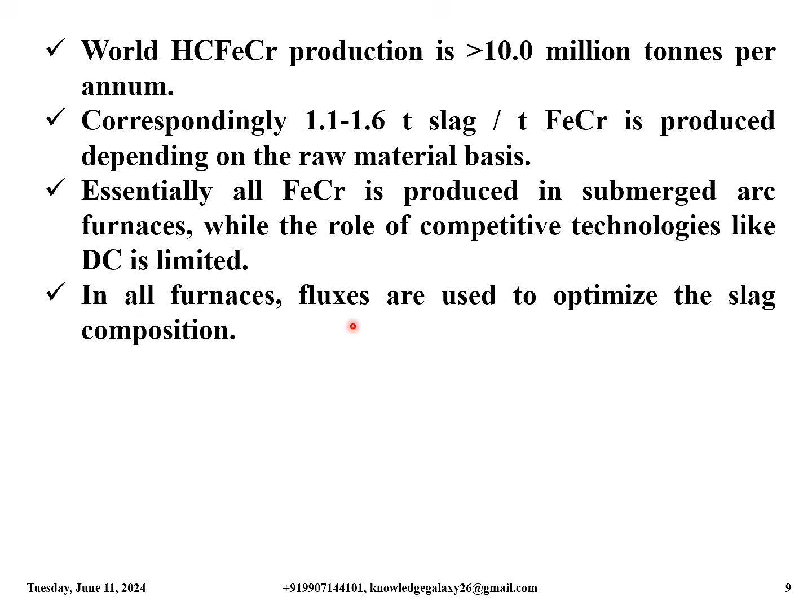Essentially, all ferrochrome is produced in submerged arc furnaces, while the role of competitive technologies like direct DC is limited. In all furnaces, fluxes are used to optimize the slag composition. Vital characteristics of slag are melting point, electrical conductivity, and viscosity. The main components of ferrochrome slag are SiO2, Al2O3, and MgO.

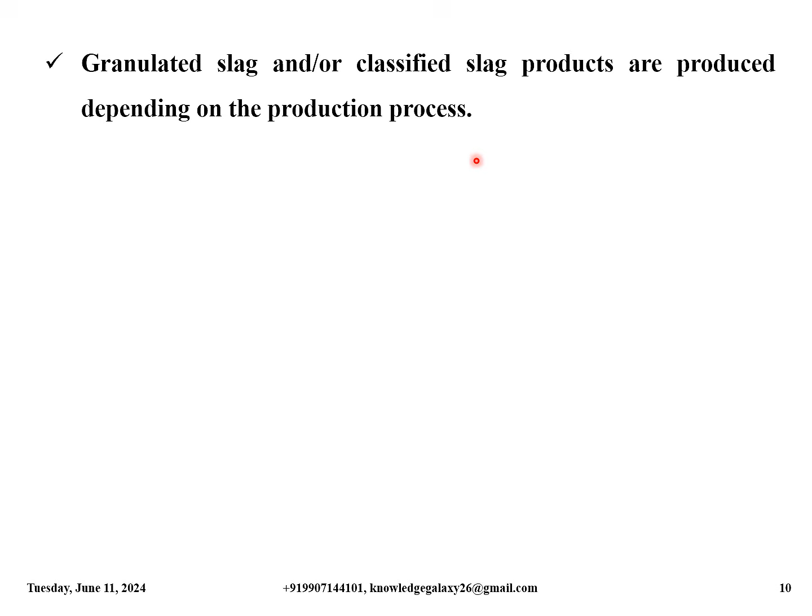Additionally, it consists of chromium and iron oxides and CaO. Granulated slag and/or classified slag products are produced depending on the production process. The slag products are mainly marketed for road and civil construction purposes, but also for producing refractories.

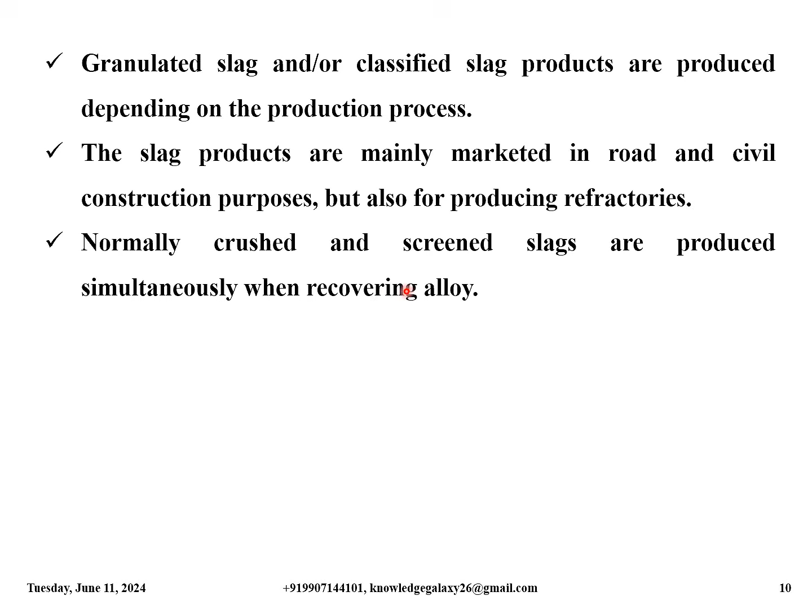Normally, crushed and screened slags are produced simultaneously when recovering alloy. The leachate of slag products is low and performance results are excellent. Slag products successfully replace natural sand and macadam. Generation of waste is essentially reduced. Producing and using slag products is good technology, and it is an essential environmental aspect.

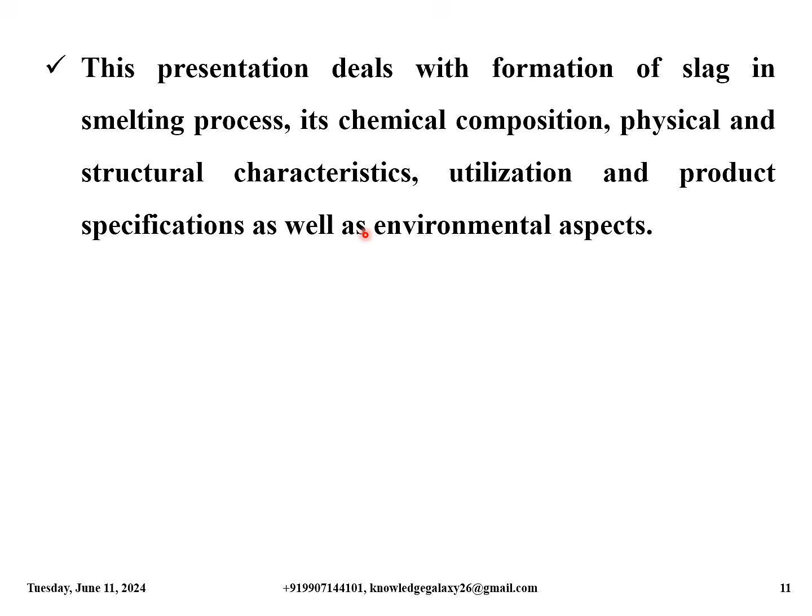This presentation deals with formation of slag in the smelting process, its chemical composition, physical and structural characteristics, utilization and product specifications, as well as environmental aspects.

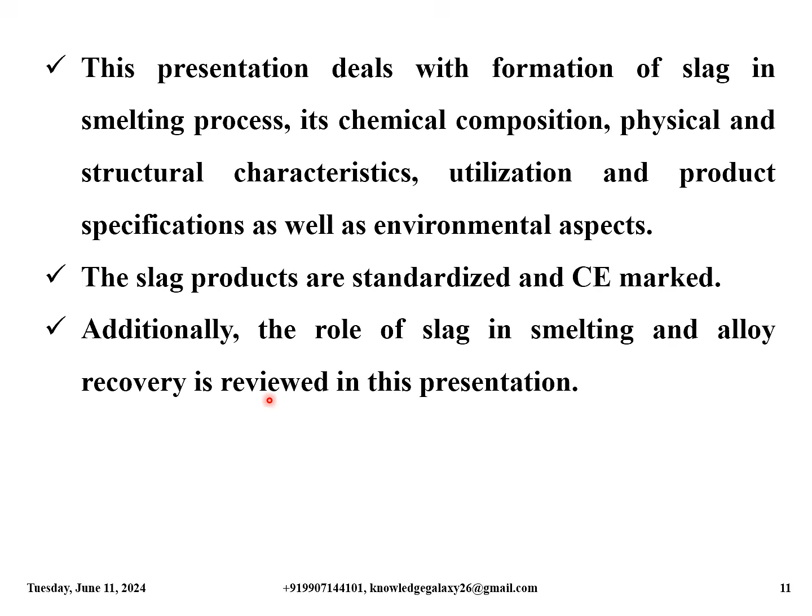The slag products are standardized and CE marked. Additionally, the role of slag in smelting and alloy recovery is reviewed in this presentation.

The raw material in the production of ferrochrome is chromite ore, which is a chrome and iron oxide containing mineral. Chromite is used as lumpy ores or fine concentrates, which must generally be agglomerated to make them a usable charge for the furnace.

Fines in the smelting furnace cause unbalanced operation and thus decrease productivity.

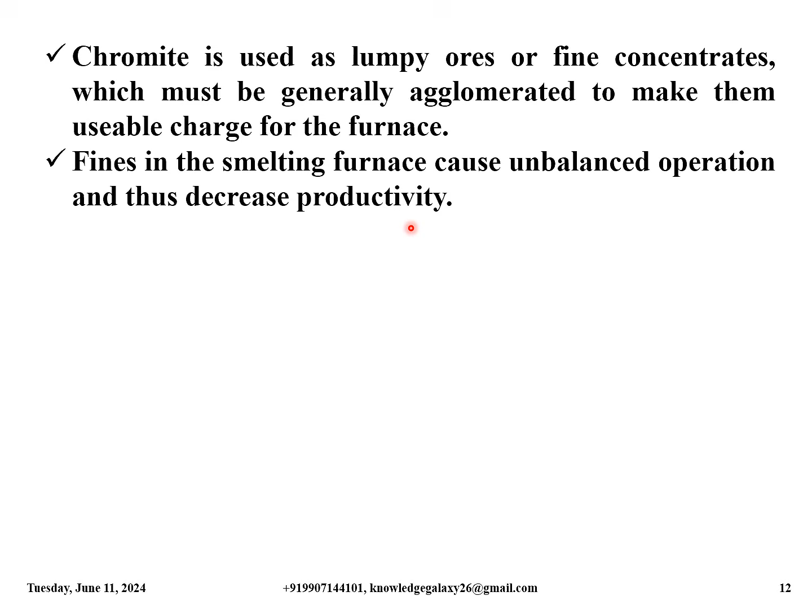Different types of carbon sources are used to reduce metal oxides in the furnace. The most important of them is metallurgical coke.

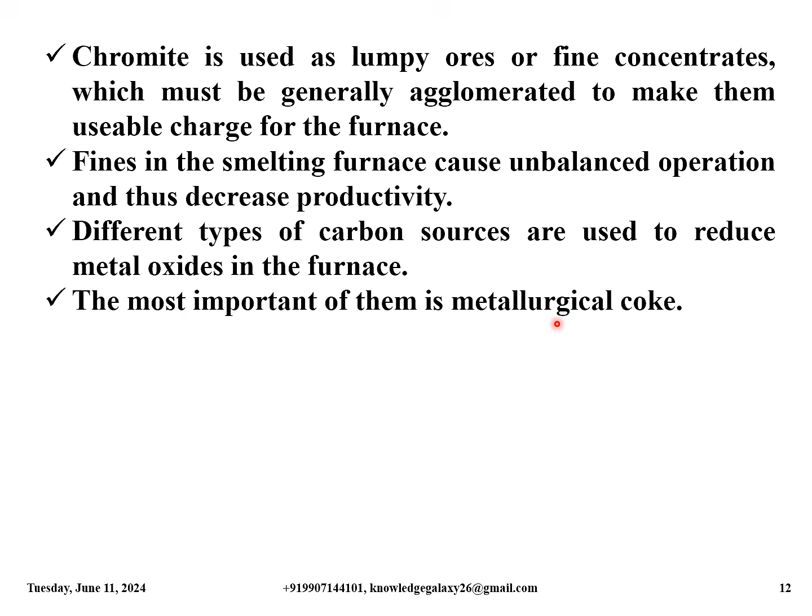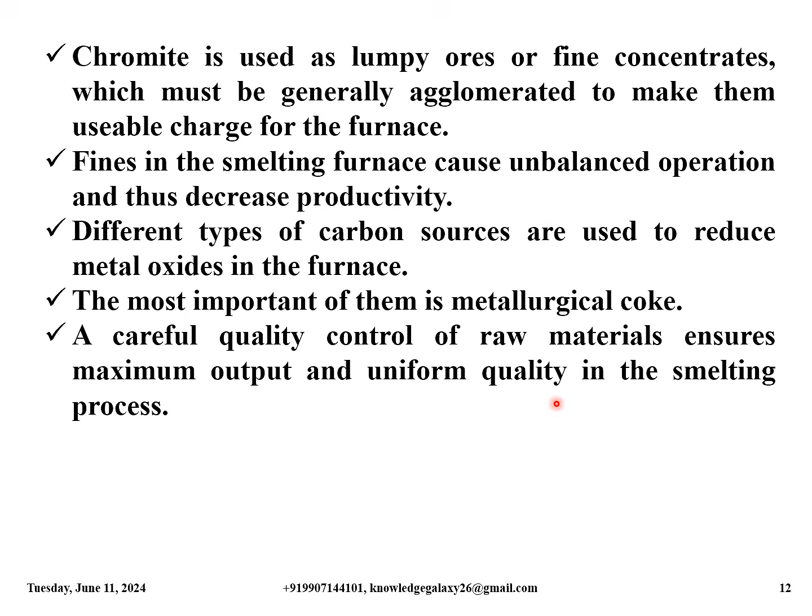A careful quality control of raw materials ensures maximum output and uniform quality in the smelting process. Quartzite, bauxite, dolomite, corundum, lime, and olivine are used as fluxing materials to get the right composition of slag.

The smelted products obtained from the smelting furnaces are ferrochrome alloy and slag. The slag production is in the ratio of 1.1 to 1.6 tons per ton of ferrochrome production, depending on the feed materials.

Using modern process control and good quality charge materials, the optimal slag composition can be attained. Important factors are temperature and composition of the slag, viscosity and electrical conductivity.

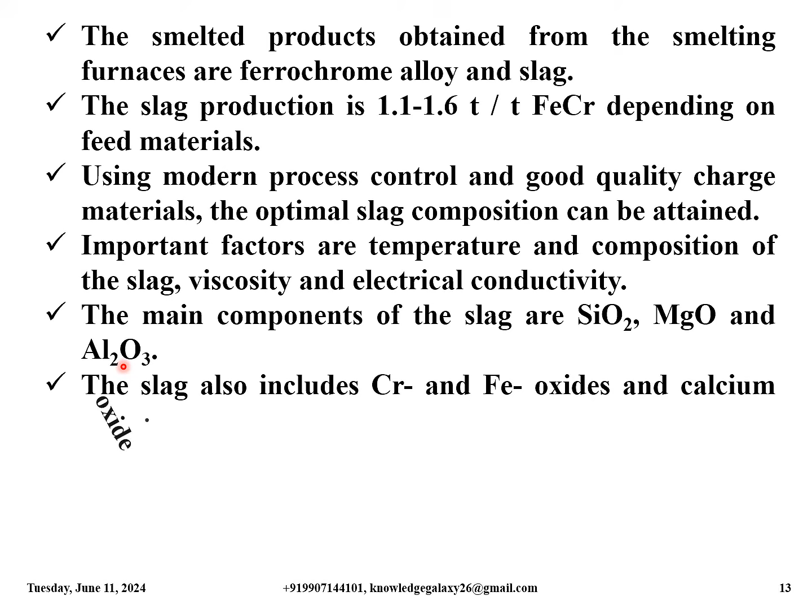The main components of the slag are SiO2, MgO and Al2O3. The slag also includes chromium and iron oxides and calcium oxide. Common phases in the slag are glass, spinels and forsterite. The slag chemistry is vital for efficient ferrochrome production.

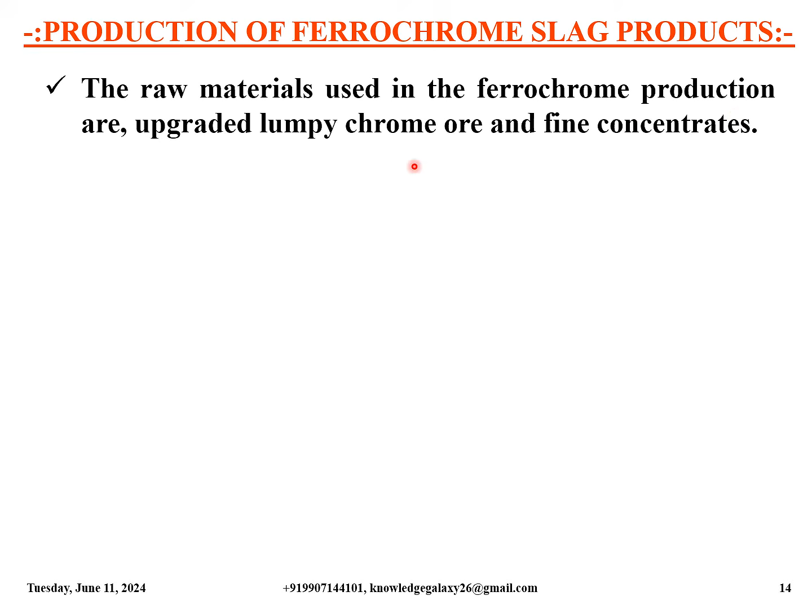Moving ahead, let us discuss the production of ferrochrome slag and products. The raw materials used in ferrochrome production are upgraded lumpy chrome ore and fine concentrates.

Fine concentrates are first ground and made into pellets in the sintering plant. The pellets are then sintered in the sintering furnace at a temperature of 1400 degrees Celsius. The charge of the smelting furnaces consists of pellets, upgraded lumpy ore, reducer that is metallurgical coke, and flux that is quartzite.

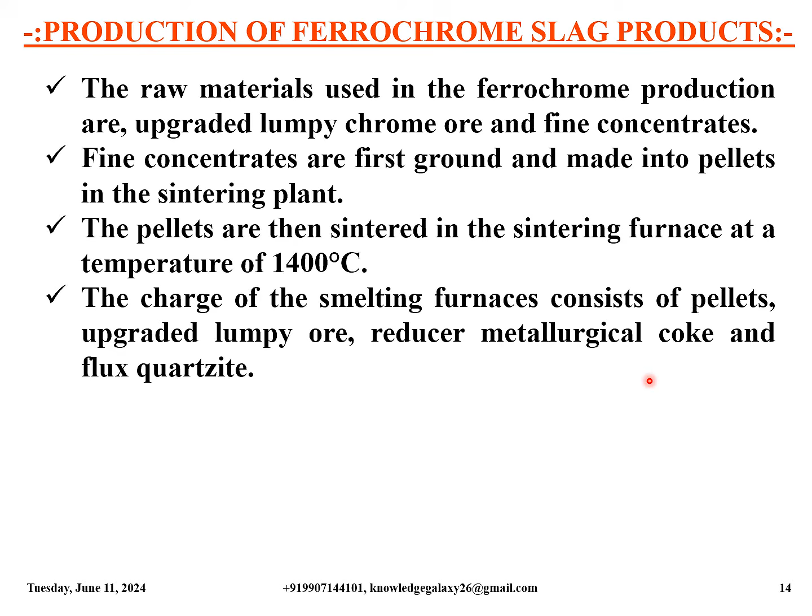Before smelting, the materials are preheated up to 500 to 800 degrees Celsius by burning carbon monoxide gas in a shaft preheater. This carbon monoxide gas is already produced during the reduction reactions by the metallurgical coke, and is very rich in energy. Its usage is essential, as it reduces CO gas emissions in the environment and also reduces energy consumption, thereby making the process more economical.

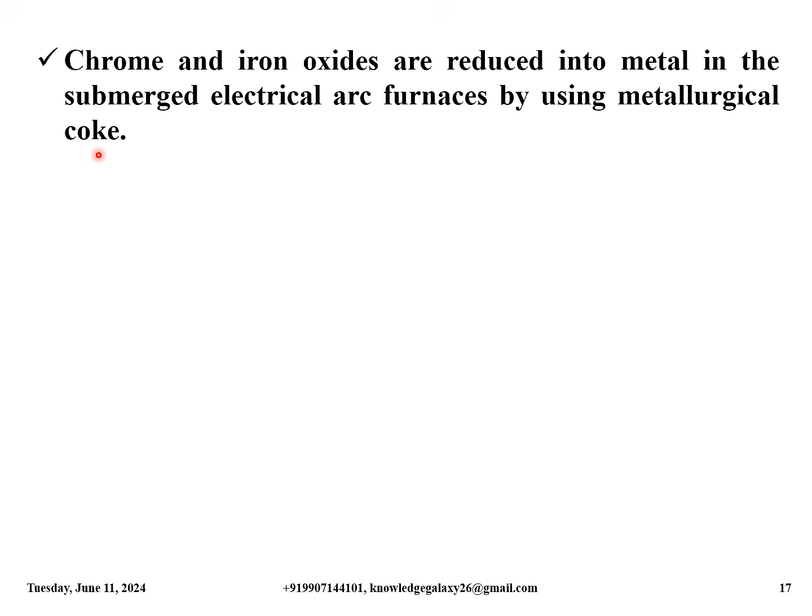So let's move on, coming back to the presentation and continuing. Chrome and iron oxides are reduced into metal in the submerged electric arc furnaces by using metallurgical coke. Simultaneously, part of silica is also reduced.

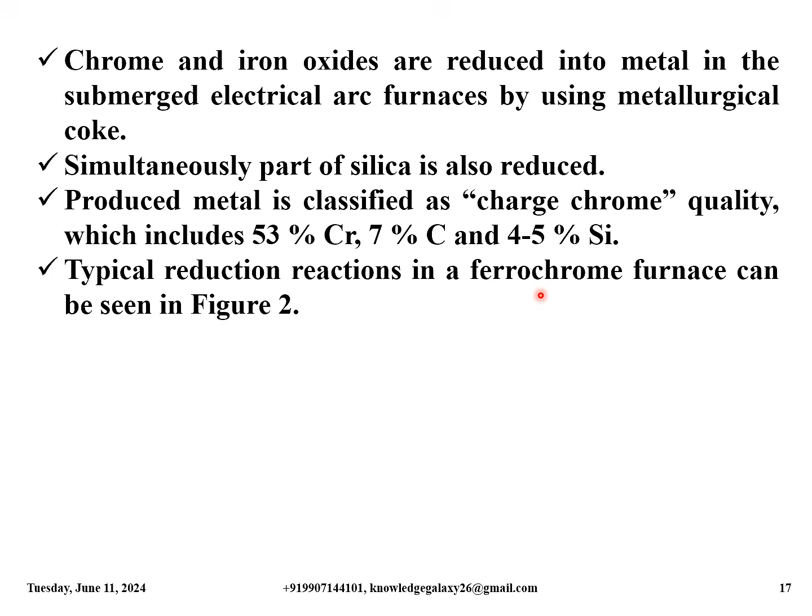The produced metal is classified as charge chrome, and the quality of which includes 53% chromium, 7% carbon and 4 to 5% silicon. Typical product reduction reactions in ferrochrome furnaces can be seen in figure 2, given in the next slide.

The other products in the smelting process are CO gas and ferrochrome slag. CO gas results from the reduction reactions. It is generated at the rate of 700 normal cubic meter per ton of ferrochrome produced, and it includes 85 to 90% CO, that is carbon monoxide, and 5% hydrogen.

At high temperatures, the charged materials start to smelt due to various reactions. Materials not dissolving into metallic ferrochrome phases primarily form silicate phases, which are generated to form ferrochrome slag.

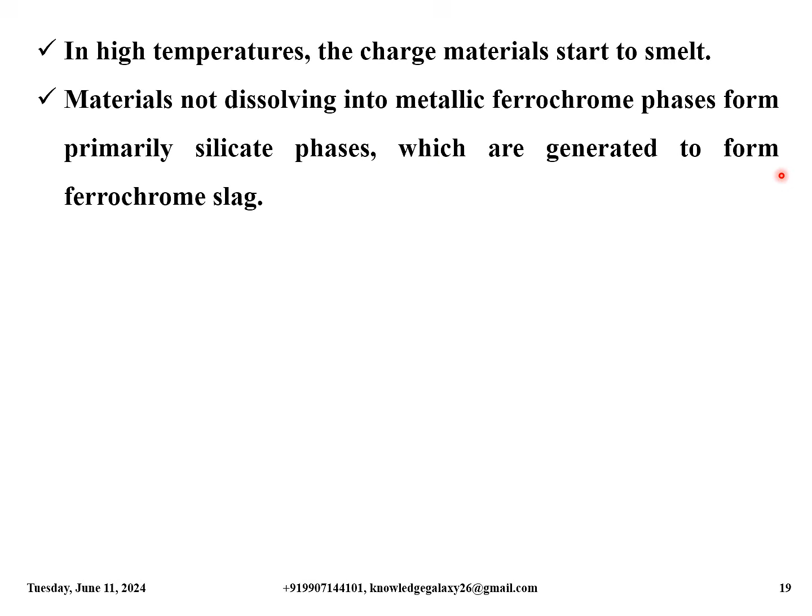The products obtained from the smelting furnaces are ferrochrome alloy and slag, and they are tapped into ladles at 2.5 hour intervals, depending upon the furnace transformer capacity and liquid metal and slag handling capacity. It is mainly granulated and the rest is air cooled. This is about the ferrochrome slag.

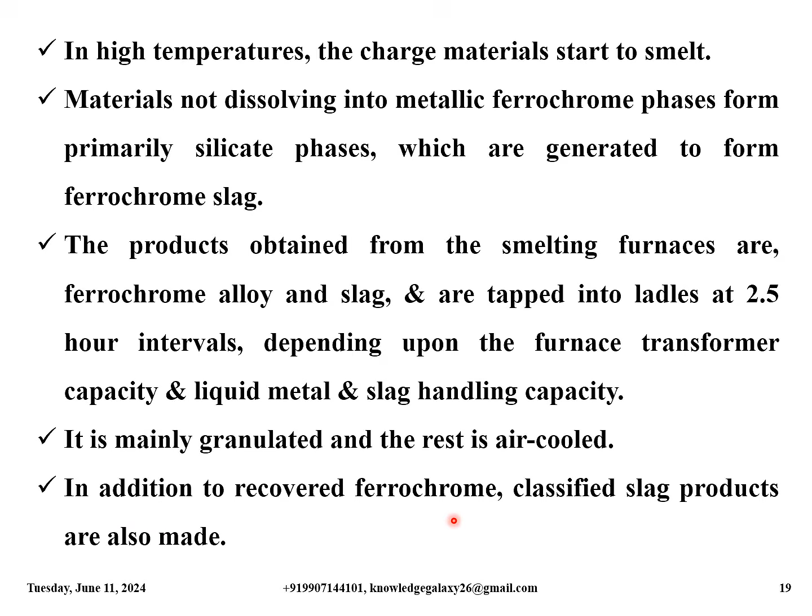In addition to recovered ferrochrome, classified slag products are also made. Now let us discuss in detail about the ferrochrome slag.

The temperature of the slag during tapping is 1700 degrees Celsius, and that of the ferrochrome alloy is 1600 degrees Celsius. The melting point of the slag has to be higher than the metal melting point because metal is heated up by using slag liquid phase, for efficient slag metal separation.

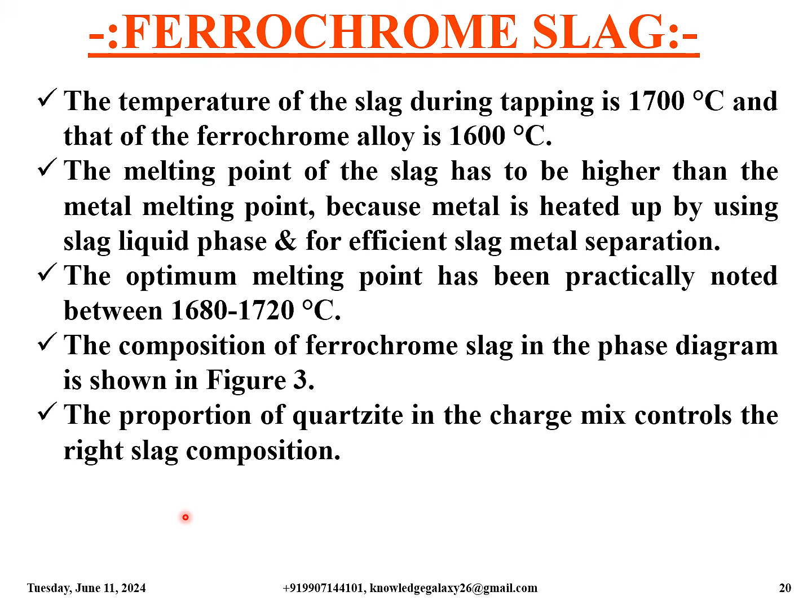The optimum melting point has been practically noted between 1680 to 1720 degrees Celsius. The composition of ferrochrome slag in the phase diagram is shown in figure 3 in the coming slides. The proportion of quartzite in the charge mix controls the right slag composition. The slag composition is tested every day by sampling and analysis.

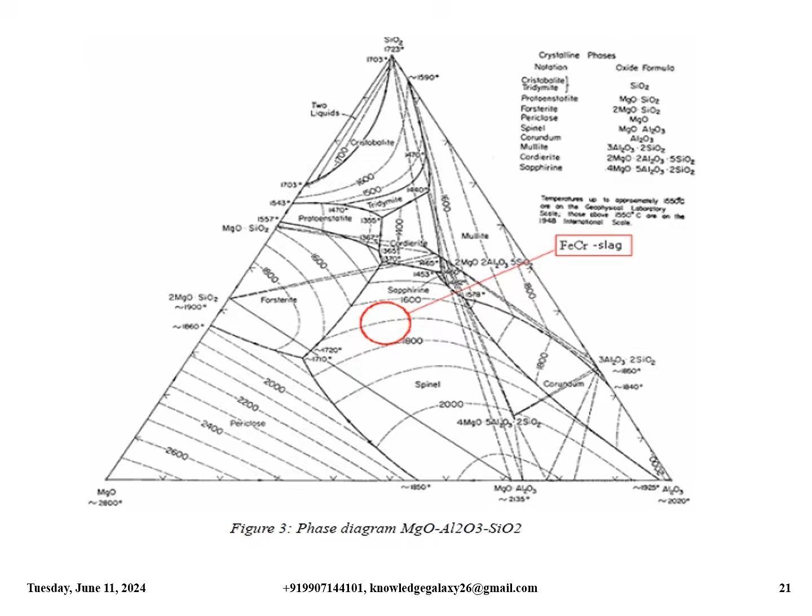This is the typical phase diagram of MgO, Al2O3, SiO2 in the ferrochrome slag phase, and you can observe it in detail. This is the particular region where the ferrochrome slag is obtained. Okay, going good, let's move on.

The typical ferrochrome slag composition is 30% SiO2, 26% Al2O3, 23% MgO and 2% CaO. The chrome content in the slag is about 8% and the iron content is 4% respectively. Ferrochrome slag is acidic in nature.

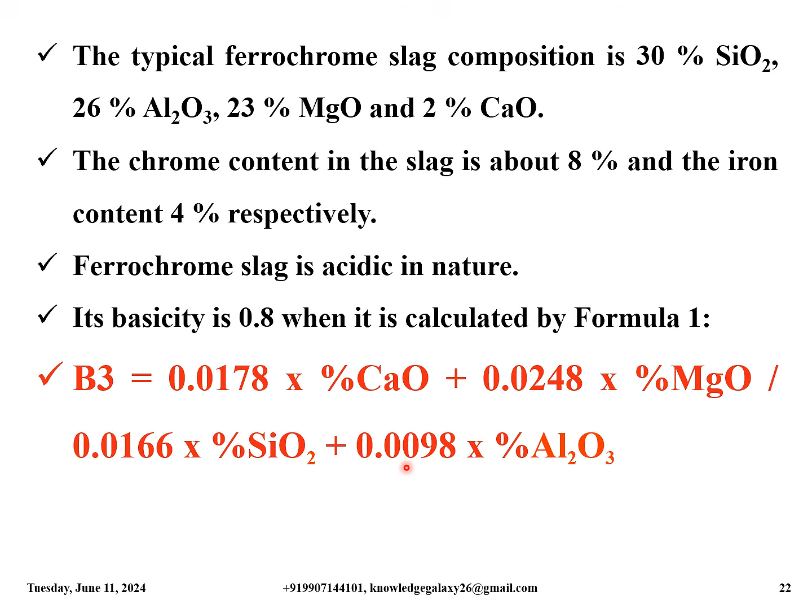Its basicity is 0.8 when calculated by the formula: B3 equals 0.0178 times percentage CaO plus 0.0248 times percentage MgO, whole divided by 0.0166 times percentage SiO2 plus 0.0098 times percentage Al2O3.

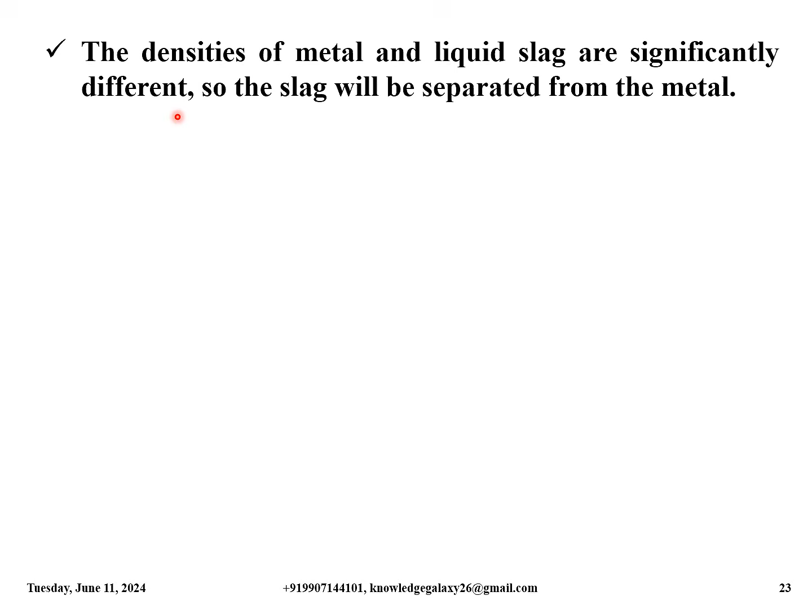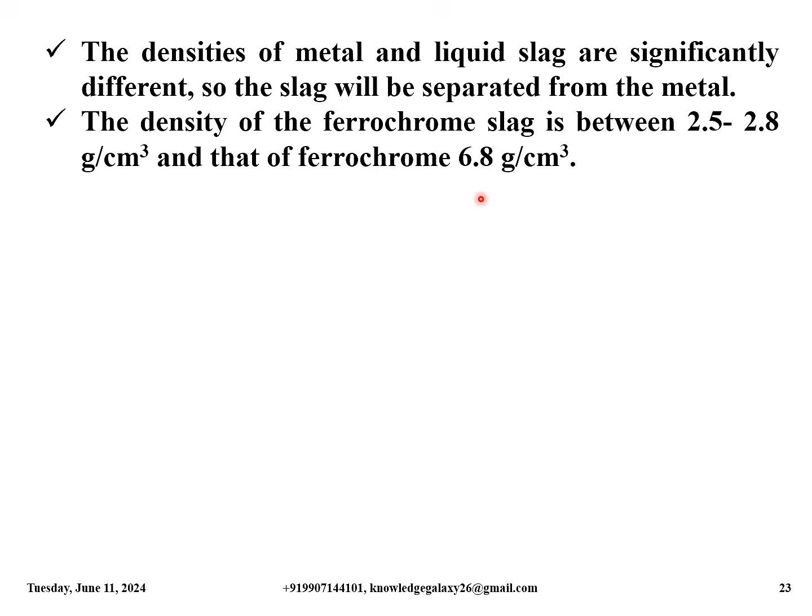The densities of metal and liquid slag are significantly different, so the slag will be separated from the metal. The density of the ferrochrome slag is between 2.5 to 2.8 grams per cubic centimeter and that of ferrochrome alloy is 6.8 grams per cubic centimeter.

The viscosity of slag is a function of composition and temperature, and it also has an essential meaning in the separation of slag and metal. The viscosity of the ferrochrome slag will increase when the content of SiO2 and Al2O3 rise, in which case aluminium silicon chains also grow.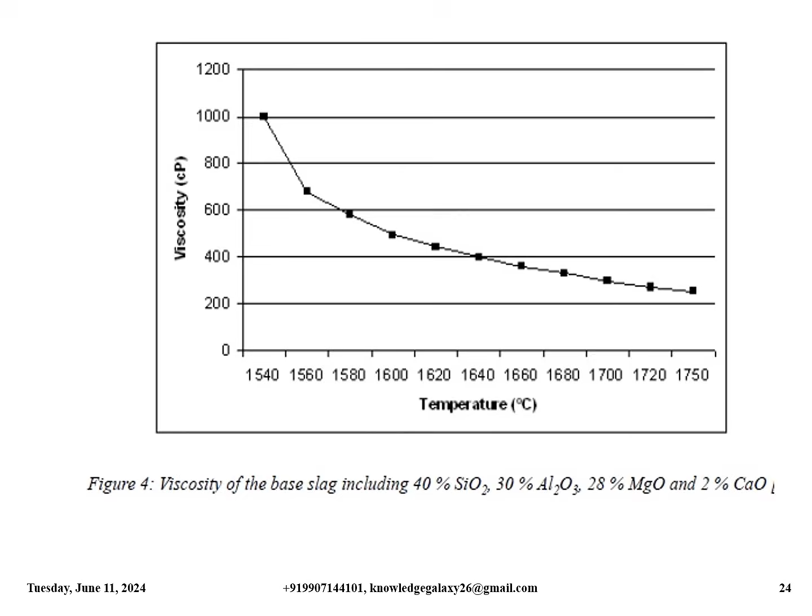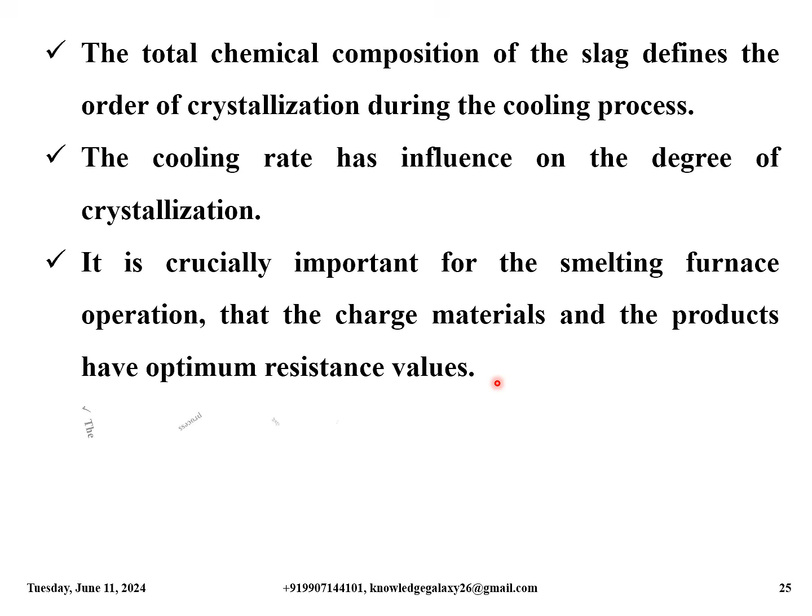The total chemical composition of the slag defines the order of crystallization during the cooling process. The cooling rate has influence on the degree of crystallization. It is crucially important for the smelting furnace operation that the charge materials and the products have optimum resistance values. The process slag has a conductivity of 50 to 70 S per M calculated by the Johnston formula.

Now let us again discuss something in detail about the ferrochrome slag products. The ferrochrome slag products are granulated slag as well as classified slag products made by crushing and screening. The main part of slag is granulated.

The crushed and screened slag products are produced from air-cooled lumpy slag which is collected from various process phases, for example from ladles and launders. The slag is directly granulated during tapping where ferrochrome is tapped into ladles.

The overflow from the ladles flows along the slag launder to the granulation pond, where high pressure water breaks slag into small fractions and efficiently cools it down.

Granulated slag is a very homogeneous product. The grain size is less than 6 mm. A granule is tight and partly crystalline.

Typically, the granulated slag includes 3 different phases: amorphous glass phase, crystalline and zonal iron, magnesium, chromium, aluminium spinels, and metal drops.

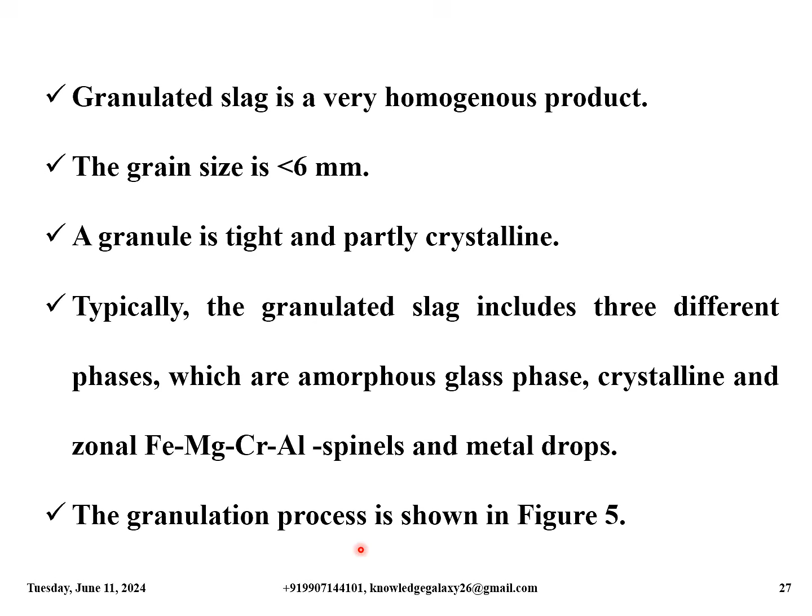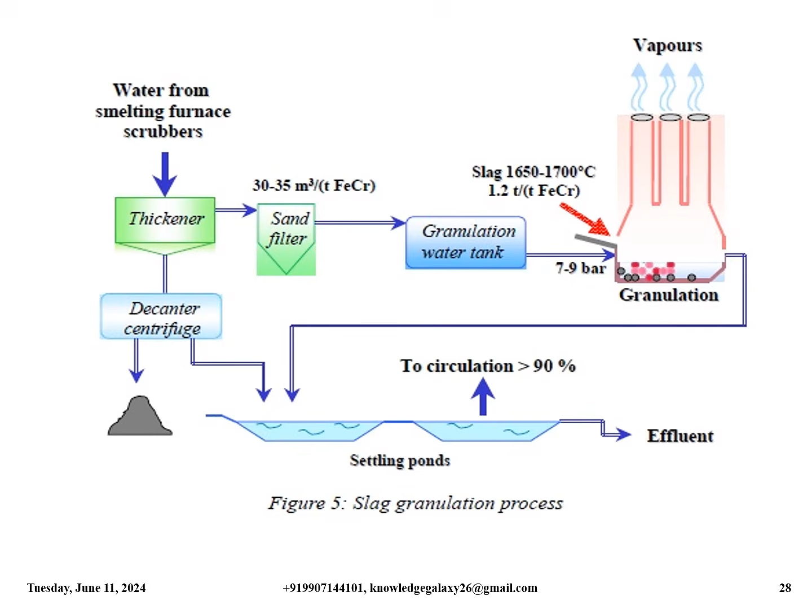The granulation process is shown in figure 5 in the next slide. So this is the slag granulation process. Normally it is applied all across the world in the ferrochrome production plants.

The ferroalloy separation from the lumpy slag happens in a special process which is based on gravity and magnetic separation. The first stage of slag processing is crushing and screening the feed material to fractions of 0 to 4 mm and 4 to 22 mm.

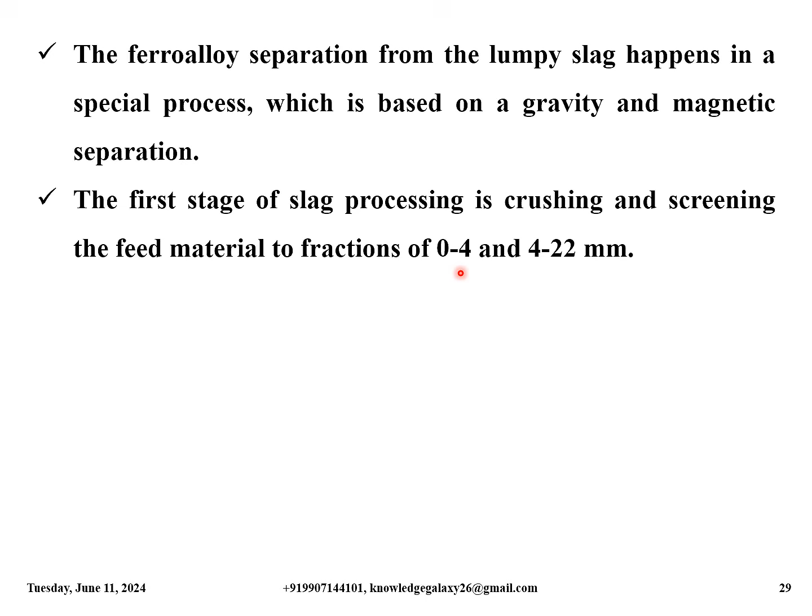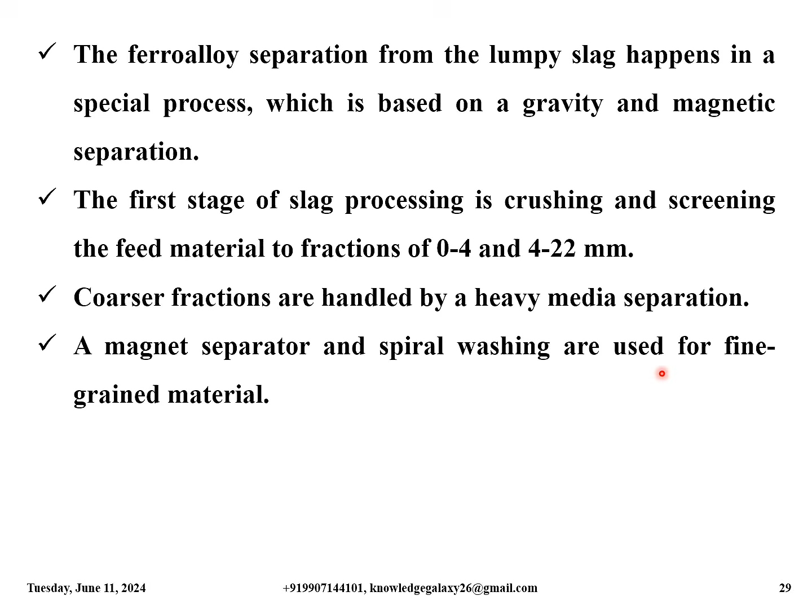Coarser fractions are handled by heavy media separation. A magnet separator and spiral washing are used for fine-grained materials. The recovered alloy of 0 to 4 and 4 to 22 mm are sellable products.

The slag products from the process are aggregates of 0 to 4, 4 to 11, and 11 to 22 mm size fractions. The crystallization portion of lumpy slag is higher due to slower air cooling than that of granulated slag.

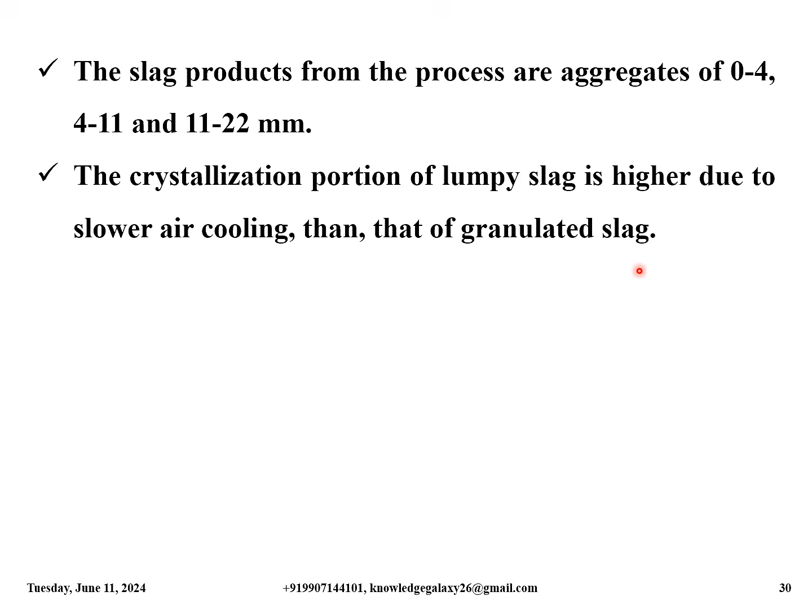The structure of the slag is partly crystalline and partly glassy. Significant phases are amorphous glass, iron, magnesium, chromium, aluminium spinels, forsterite, magnesium aluminum silicate, and metal alloy.

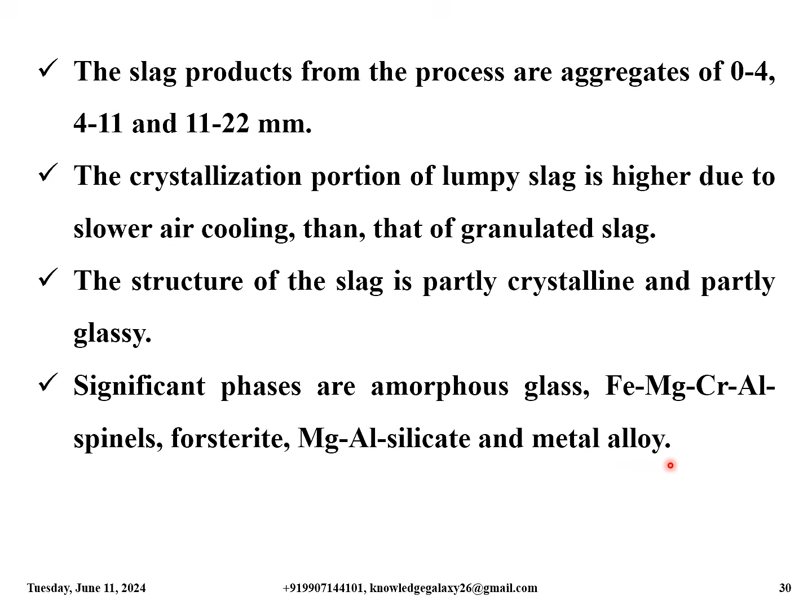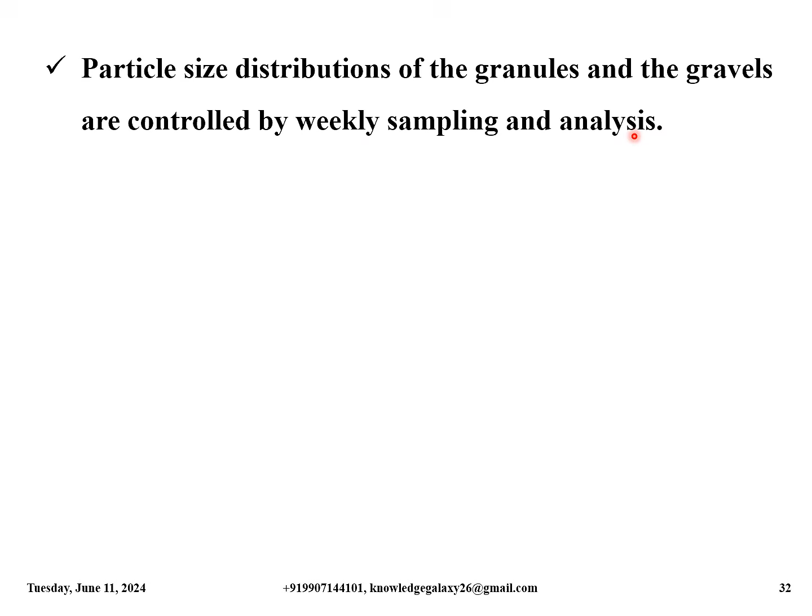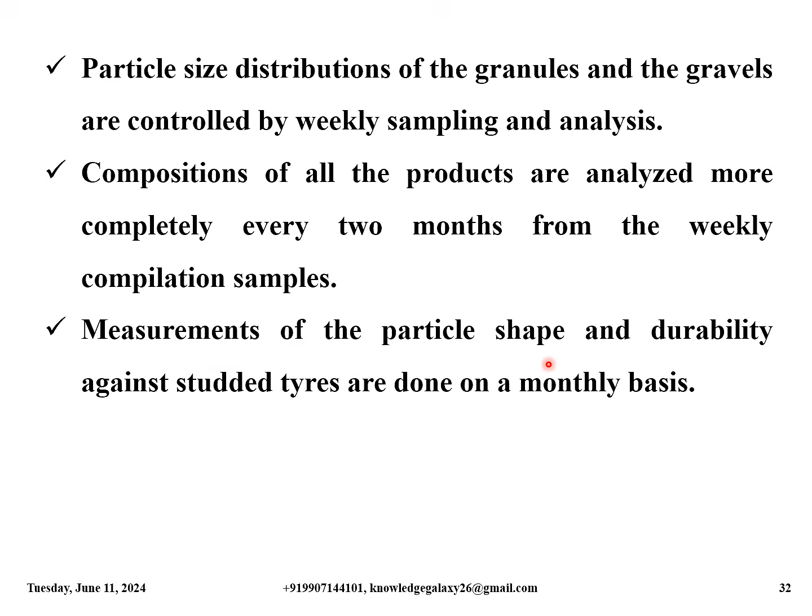Particle size distributions of the granules and the gravels are controlled by weekly sampling and analysis. Composition of all the products are analyzed more completely every 2 months from the weekly compilation samples. Measurements of particle shape and durability against studded tires are done on a monthly basis.

An affinity to bituminous binders, resistance to fragmentation, and durability against freeze or thaw are tested annually from the compilation samples.

Now let us discuss the use of ferrochrome slag products - how they are used, where they are used, all details are here. The ferrochrome slag products are chemically very stable. They are used in civil engineering and road construction, and also to some extent for producing refractory materials.

Granulated slag is also used as subsurface drainage material.

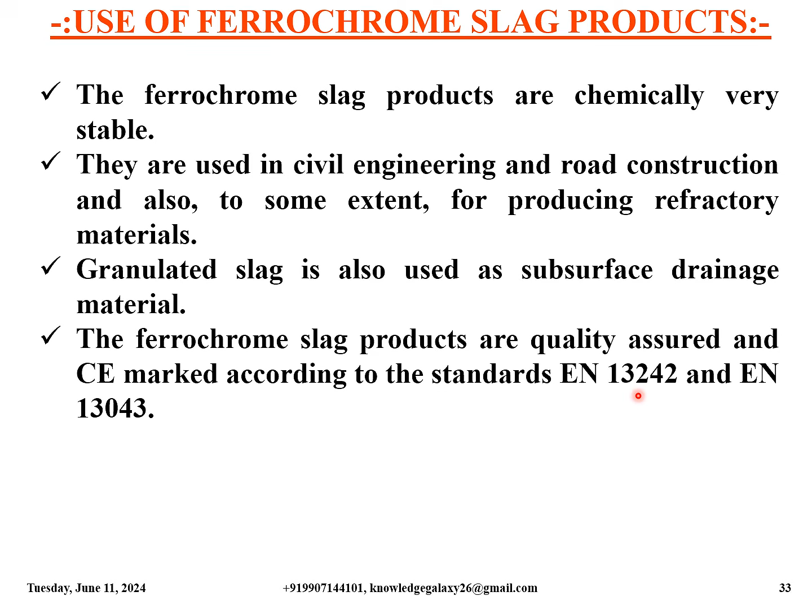The ferrochrome slag products are quality assured and CE marked according to the standards EN 13242 and EN 13043. The main requirements for CE marking are the aggregate size and size distribution, resistance to fragmentation, durability against studded tires, and durability against freeze or thaw.

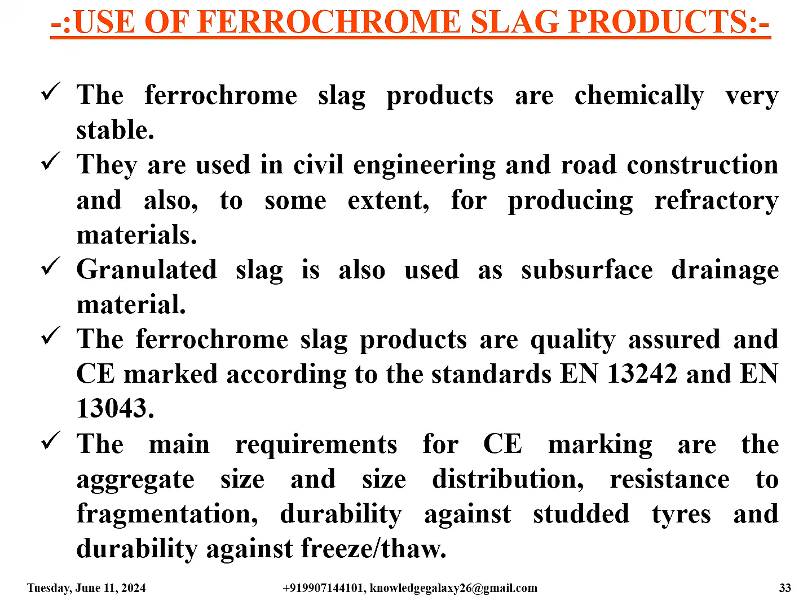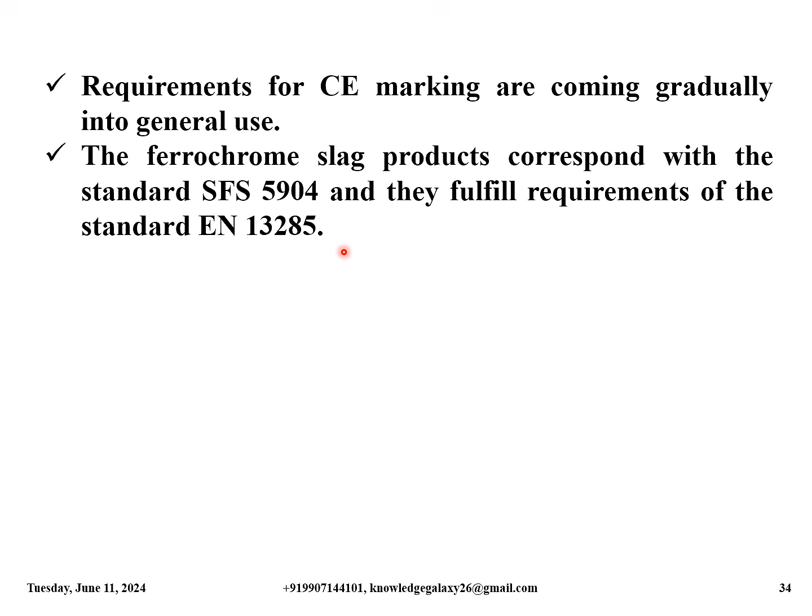Requirements for CE marking are coming gradually into general use. The ferrochrome slag products correspond with the standard SFS 5904 and fulfill requirements of the standard EN 13285. They have their own CAS or EINECS numbers and operational safety bulletins.

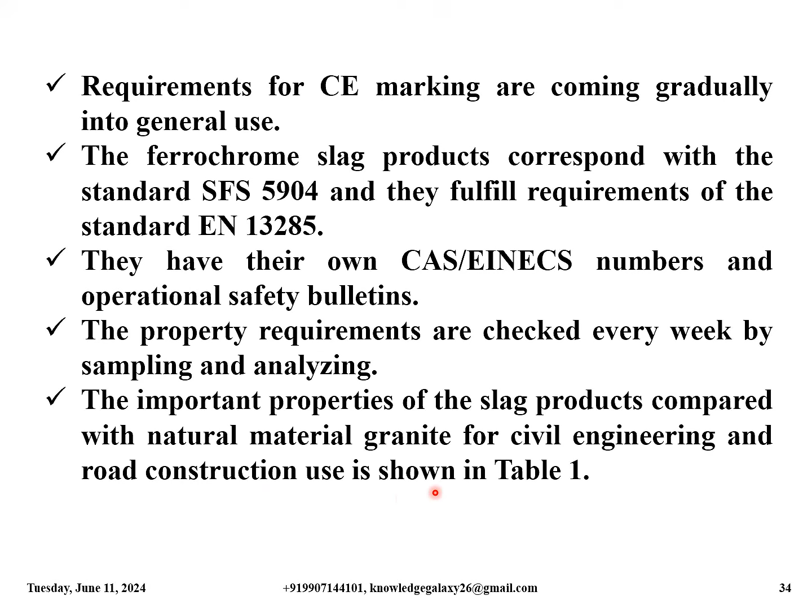The property requirements are checked every week by sampling and analyzing. The important properties of the slag products compared with natural material granite for civil engineering and road construction use is shown in table 1 in the given slide.

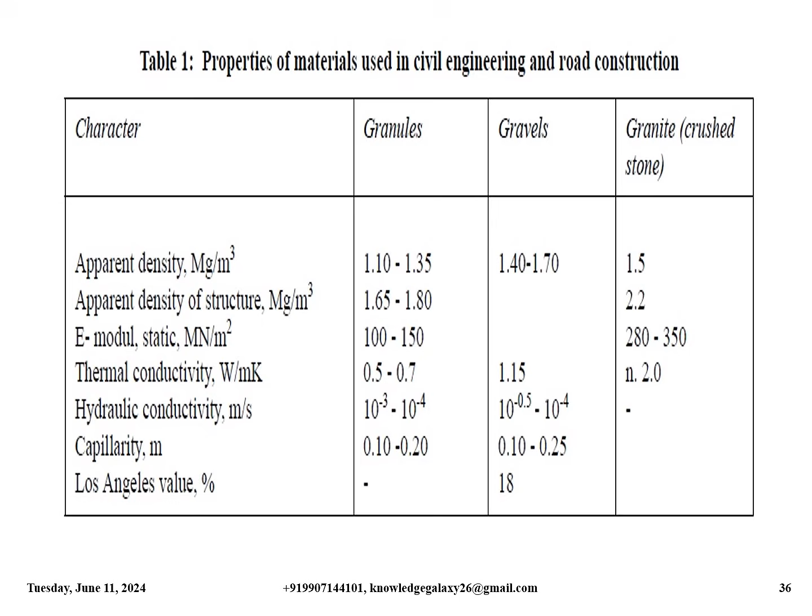The ferrochrome slag products are excellent materials for road construction because the removal of earth is less and the need of new material for road is 30 to 50% smaller compared with natural sand and macadam, for example.

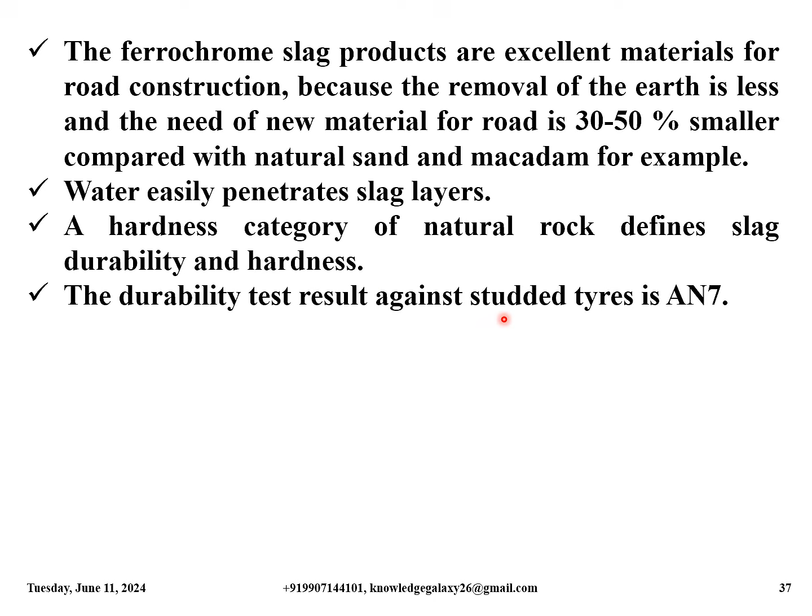Water easily penetrates slag layers. A hardness category of natural rock defines slag durability and hardness. The durability test result against studded tires is AN7. In that category, the crushed and screened slag products fit in the best class 1.

The durability against freeze or thaw is good, that is F1. The class of the resistance to fragmentation is LA20. The particle size distributions are stable.

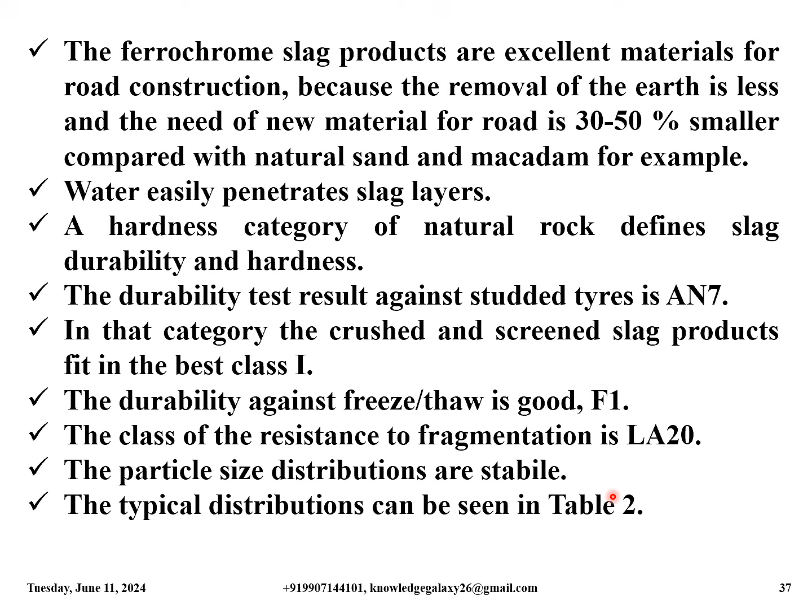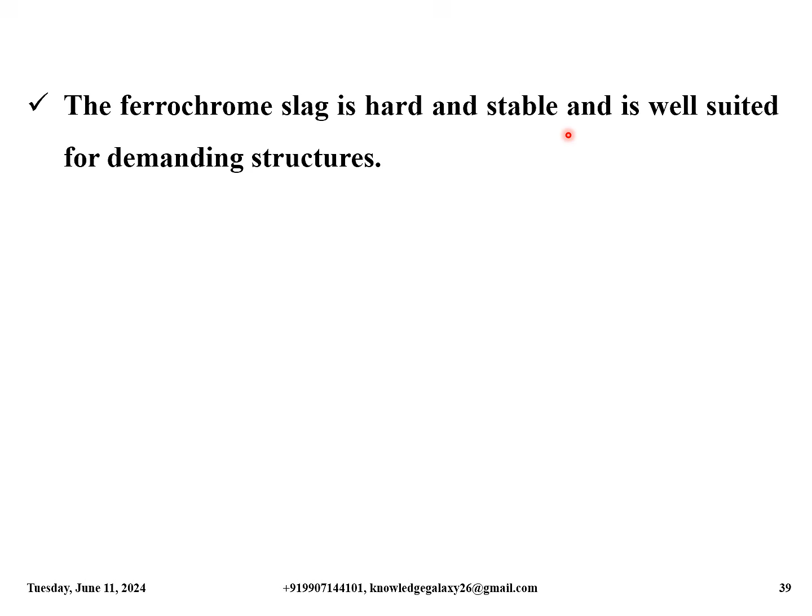The ferrochrome slag is hard and stable and is well suited for demanding structures. The slag products are used for road construction in the filtering and supporting layers and also as aggregate in the tarmac. Due to a smaller need of material and thus less transport during construction, the ferrochrome slag products speed up the construction, making the slag products economical.

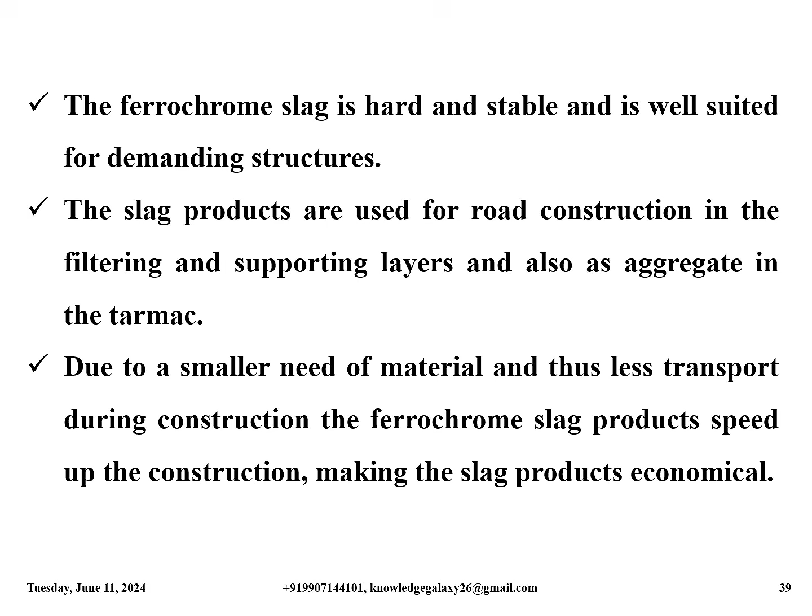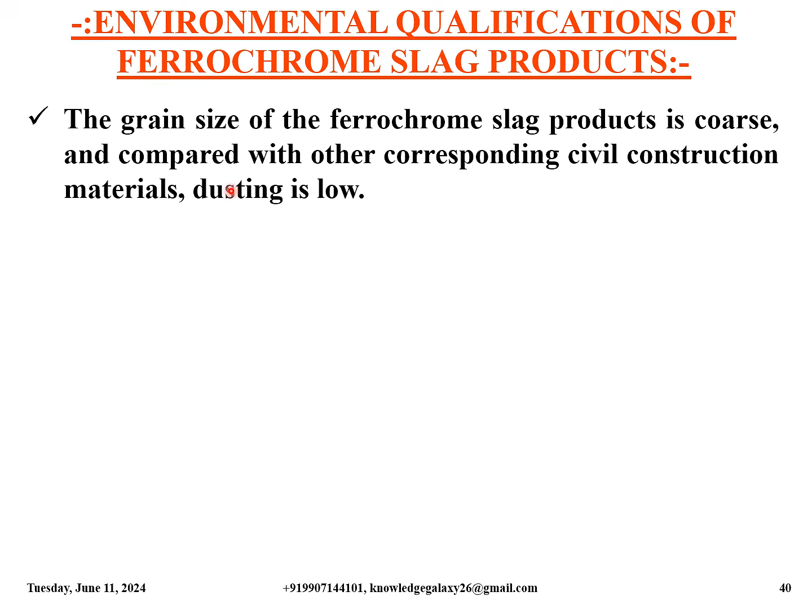Now let us discuss the environmental qualifications of the ferrochrome slag products. The grain size of the ferrochrome slag products is coarse and compared with other corresponding civil construction materials, dusting is low. Very low dusting rate is demanded for good service as insulation material.

According to the standard EN 13285, fine material proportion of slag in the toughest category has to be below 3%. In the ferrochrome slag products, this measured value is below 0.5%.

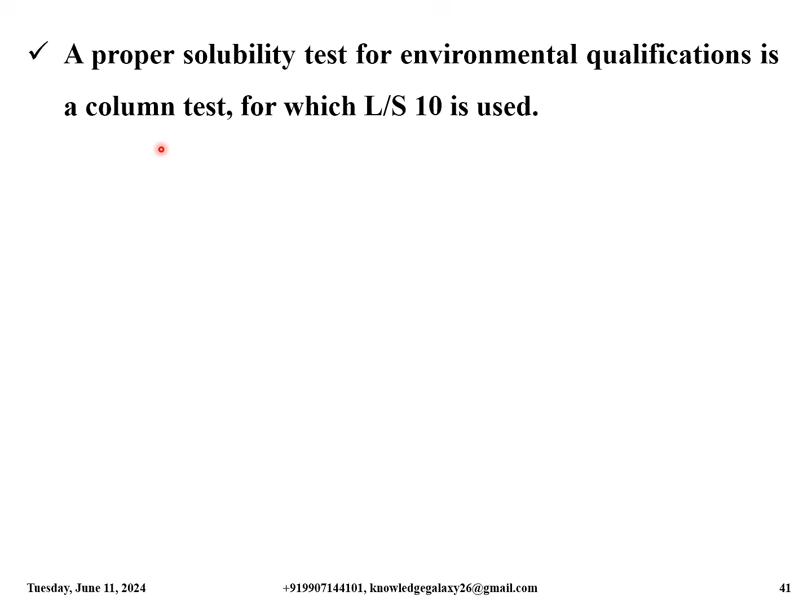Materials used for civil engineering purposes have to fulfill generally the same requirements given for normal waste at a landfill. A proper solubility test for environmental qualifications is a column test for which L/S ratio 10 is used.

Results of the column test for the ferrochrome slag products are shown in table 3 in the next slide, and they are compared with the dumping ground requirements for permanent and usual wastes. The test results show that the slag products fulfill the dumping ground requirements in terms of both the most important component chrome and the other tested metals.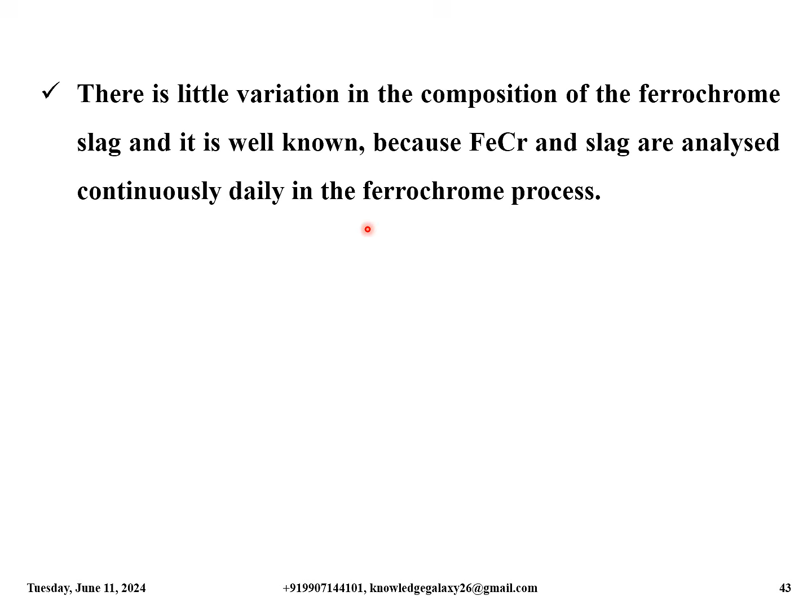There is little variation in the composition of the ferrochrome slag, and it is well known because ferrochrome and slag are analyzed continuously daily in the ferrochrome process. Smelting charge is controlled both by metal and slag analysis.

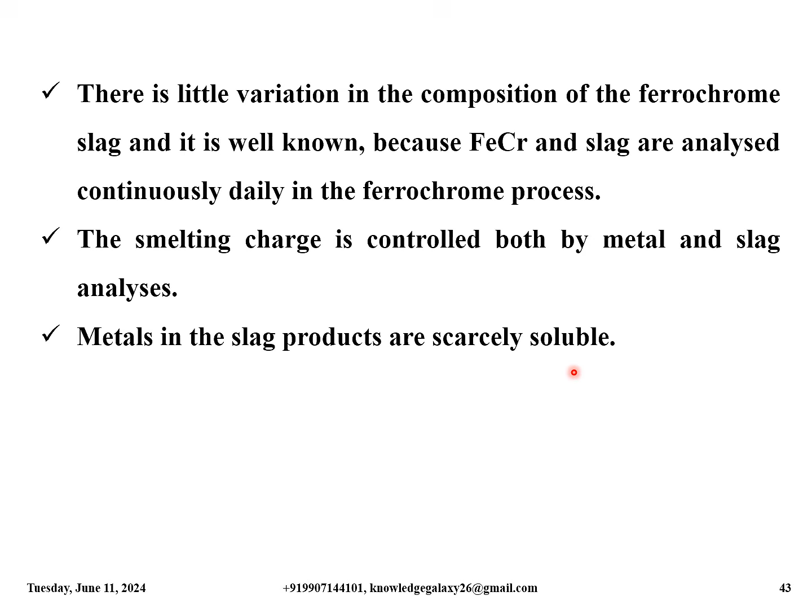Metals in the slag products are scarcely soluble. According to the risk assessment carried out, concentrations of the acid-soluble components are so low that a straight contact or unintentional ingestion does not produce any health hazard from metals.

The standard leaching test indicates only very low leaching of chrome from the ferrochrome slag. This has been proven to be a result of the mineralogical capture of chrome into the stable spinel phase and of the structural encapsulation of the dispersed crystals inside an impermeable and chemically stable glass phase.

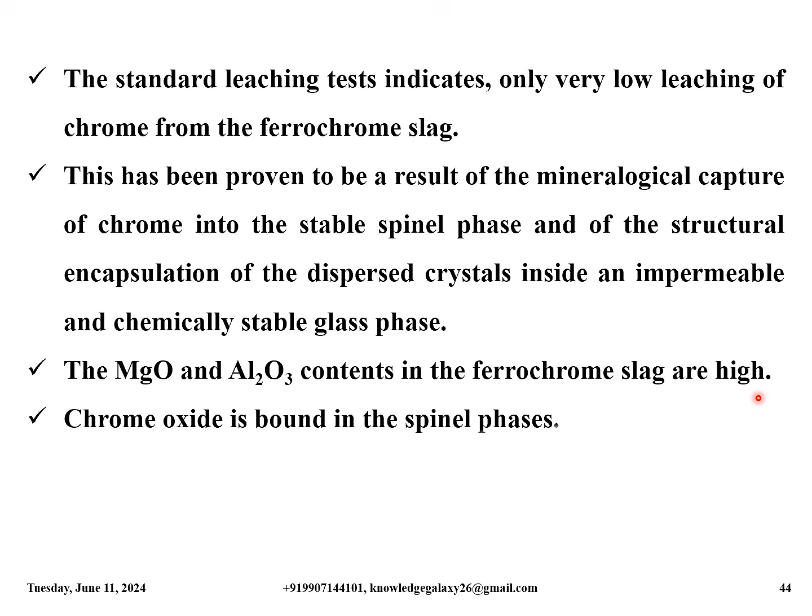The MgO and Al2O3 contents in the ferrochrome slag are high. Chrome oxide is bound in the spinel phases. The binding efficiency of chrome can be estimated by means of a factor Sp, which is about 30 for ferrochrome slag.

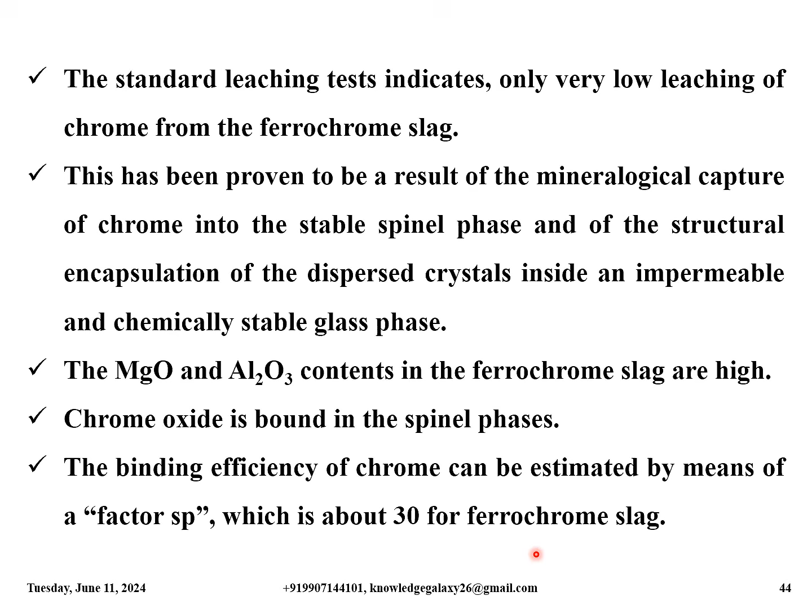If the factor Sp is higher than 5, the solubility of chrome decreases to a very low level as depicted in figure 7 in the next slide.

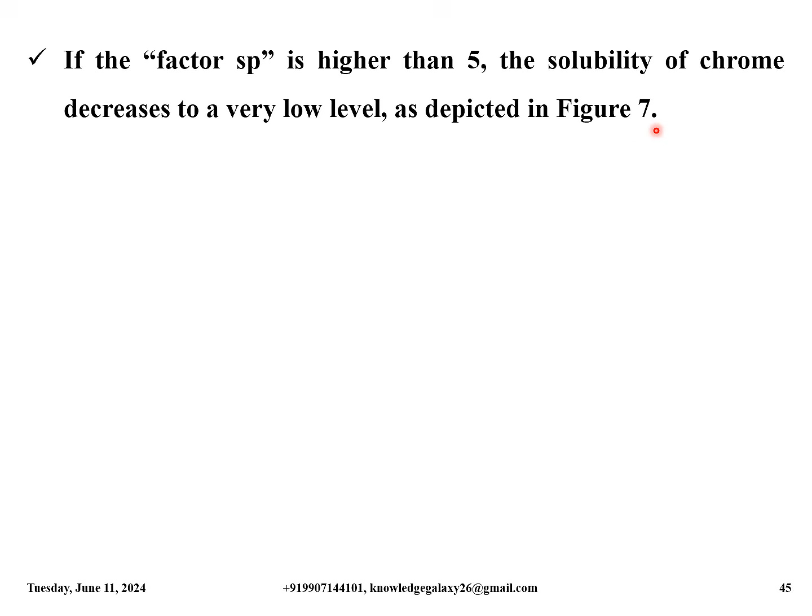Formation of soluble chrome salts, especially of hexavalent chrome, is impossible in the strongly reducing conditions of the smelting furnace, but chrome is trivalent or bivalent and metallic does occur.

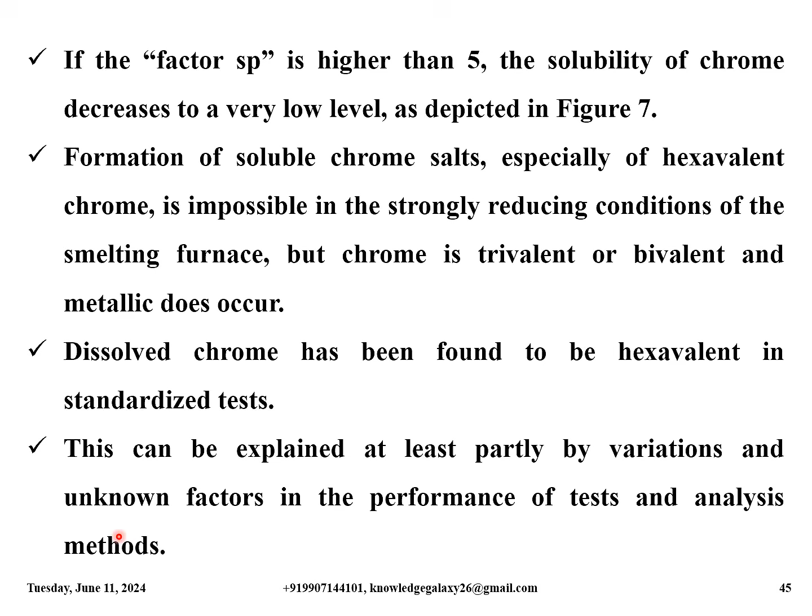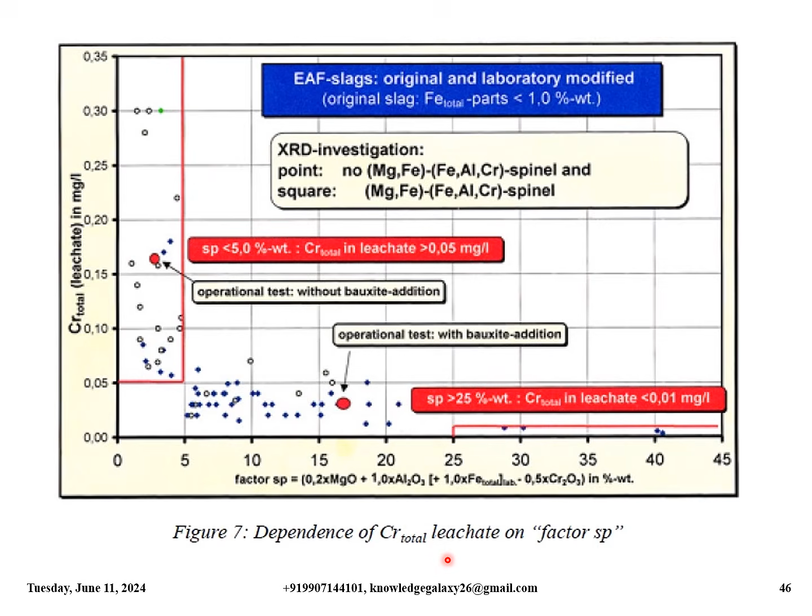Dissolved chrome has been found to be hexavalent in standardized tests. This can be explained at least partly by variations and unknown factors in the performance of tests and analysis methods. So this is figure 7, which depicts dependency of chromium total leachate on factor Sp.

So now I have come to the conclusions based on all these discussions and descriptions in these presentations. In a large project work started by the European Commission, best available techniques descriptions were prepared for different industry sectors.

According to the results, minimization of waste, recycling of byproducts, use of crushed and granulated slag for road and civil construction, and also use of slag in producing refractories are described as best technology.

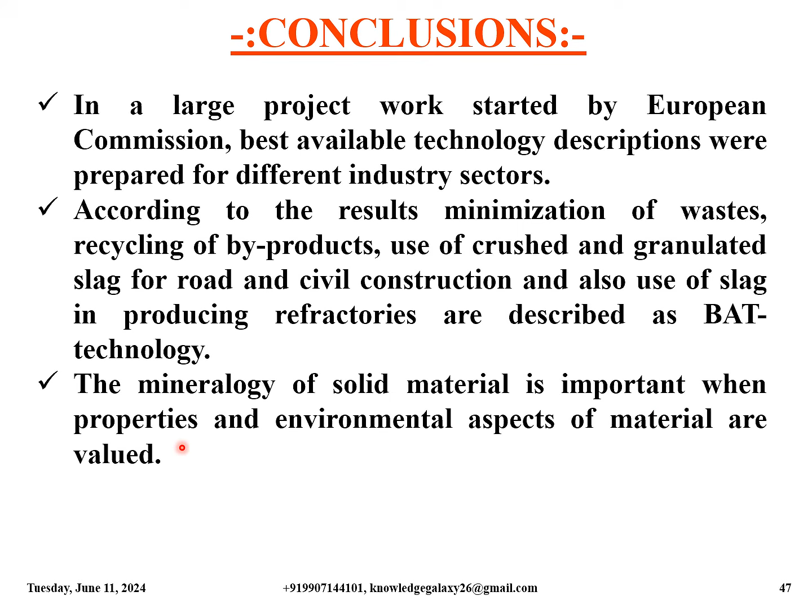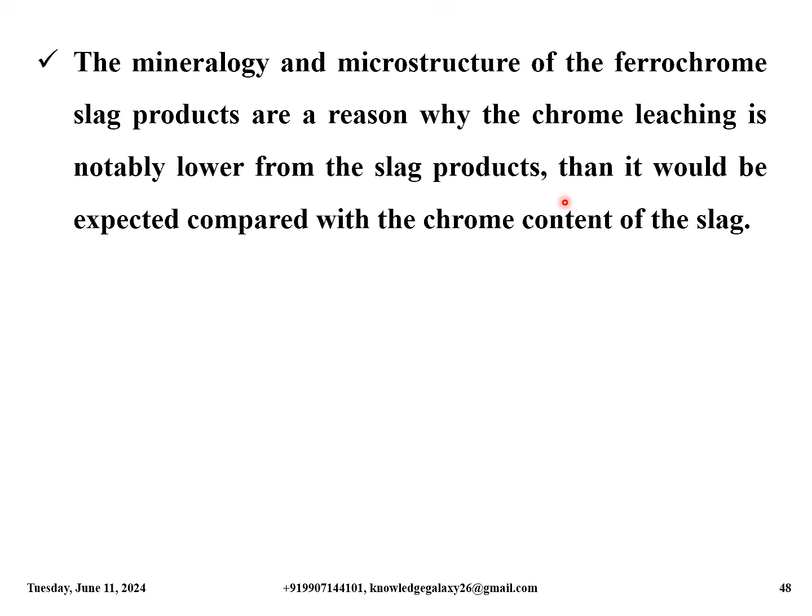The mineralogy of solid material is important when properties and environmental aspects of material are valued. The mineralogy and microstructure of the ferrochrome slag products are a reason why the chrome leaching is notably lower from the slag products than it would be expected compared with the chrome content of the slag.

The use of industrial slag products reduces the use of natural sand and macadam. It results in positive environmental effects, and that is a notable environmental aspect in ferrochrome production.

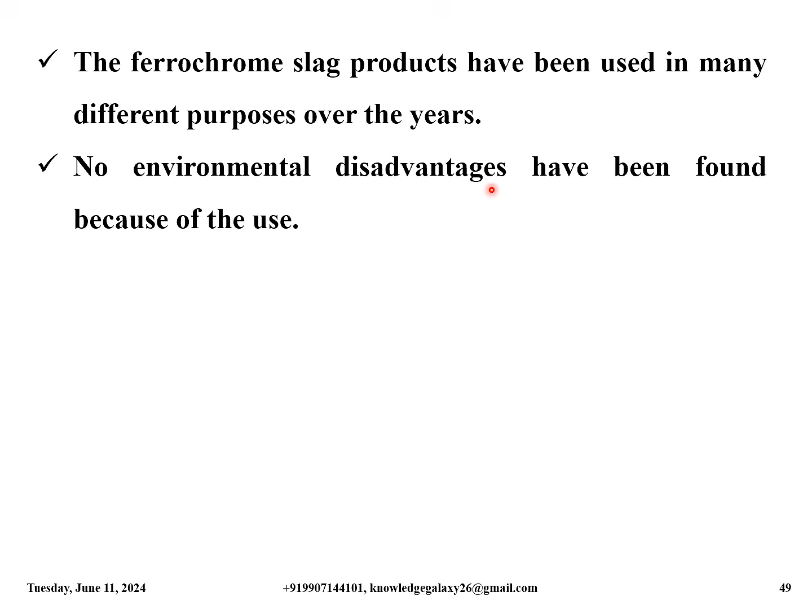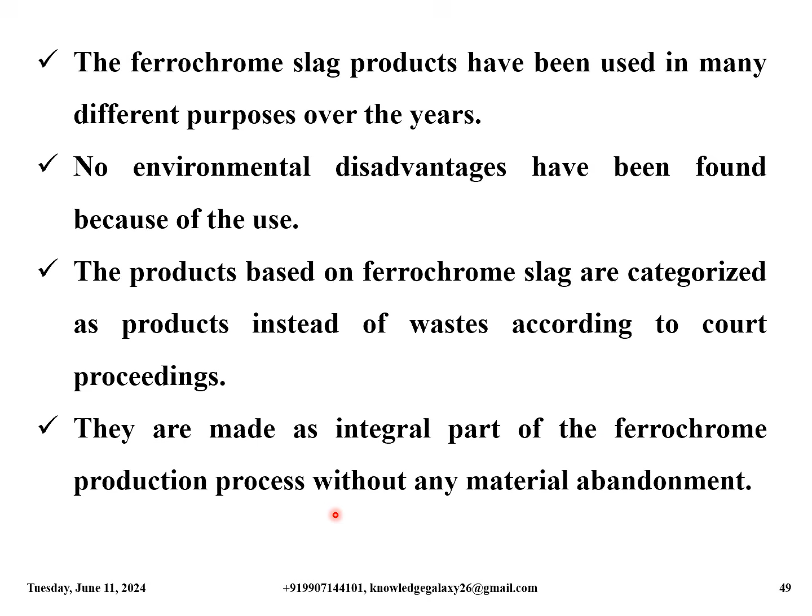The ferrochrome slag products have been used in many different purposes over the years. No environmental disadvantages have been found because of the use. The products based on ferrochrome slag are categorized as products instead of wastes according to court proceedings. They are made as an integral part of the ferrochrome production process without any material abandonment.